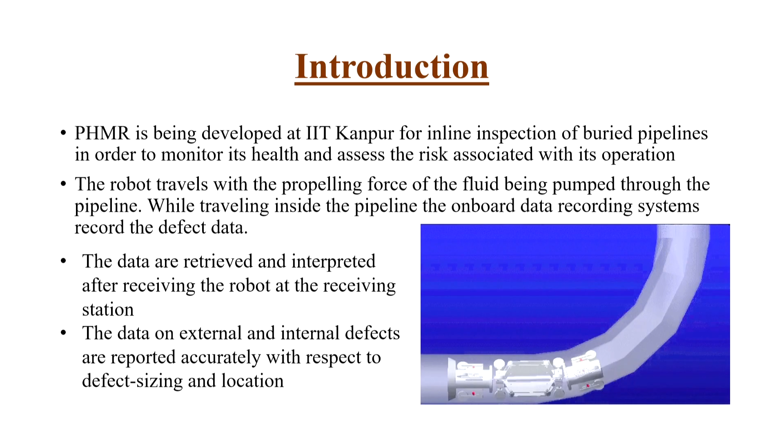The data are then retrieved and interpreted both online as well as offline from the robot, and then interpreted in terms of damages. So, the data on external and internal defects both are reported accurately with respect to different types of defect sizing and location. Now, this is a project which had been sponsored jointly by the Gas Authority of India Limited and also by the Ministry of Education through Uchchatar Avishkar Yojana.

Now, what were the objectives of this product design? Well, PHMR was aimed at developing a pipe health monitoring system which will be comprising of a range of smart sensors. Now, the outcome should be such that we should be able to design and develop an effective and economic pipeline health monitoring system based on smart sensors integrated in a crawler robot and an efficient data communication.

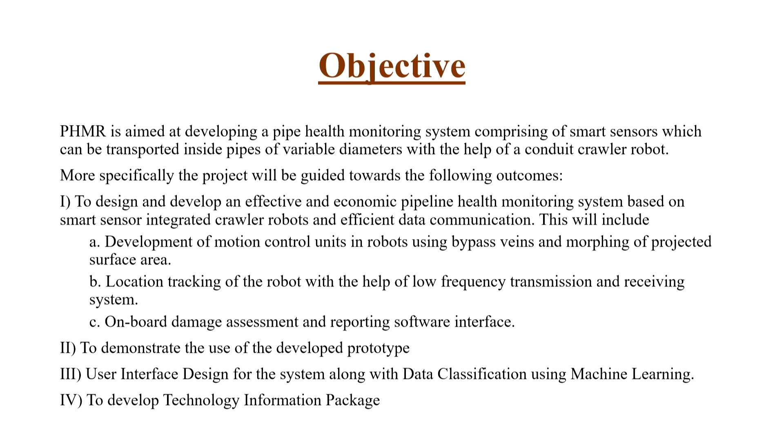So, these sensors will include development of motion control units. The entire system will include the development of motion control units in robots using different types of techniques, I will explain it later on, like bypass vanes or morphing, and then location tracking of the robot with the help of low frequency transmission and receiving system, and then onboard damage assessment and reporting software. Then we will demonstrate the use of the developed prototype. User interface must be developed and the technology information package is to be developed.

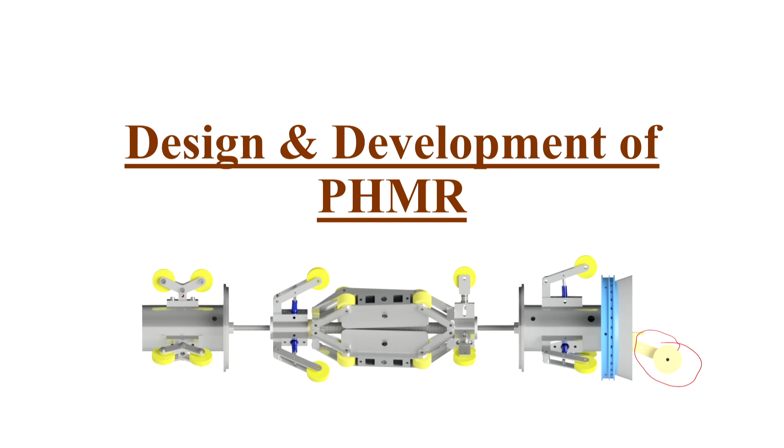So, as you can see, this is the entire PHMR, and the last one is not actually a wheel, but this is called odometer. This actually senses how much distance it is traveling. I will soon tell you about different parts of this PHMR. Now, such products cannot be developed all in one phase. So, in 3 phases, 3 different types of robots were first developed.

PHMR1, which was the initial prototype, has sensors like a smart sensor called PVDF. It is a polyvinylidene fluoride type of a sensor. This is a piezoelectric sensor. So, what does the piezoelectric sensor do? It actually gets data if there is a dynamic strain change, or if there is a deformation of a finger like appendage, which I will show you later on. If it gets deformed, it collects the deformation data and interprets it in terms of the damages in the pipe. It also has point magnetic flux leakage sensors, MFL sensors, and also optical sensors. It also has a turbine for the power generation.

Now PHMR1 of course was made of a cheaper model because it is a rapid prototype. So many times in order to develop intelligent products, I always say develop the first functional prototype, which is just the demonstration of the concept. So in this case you do not have to think of the actual material. So in this case we have parts which are made of not a very highly rugged material. But the second one is based on a fully aluminum body, and later on we have used an even higher grade, space grade aluminum alloy.

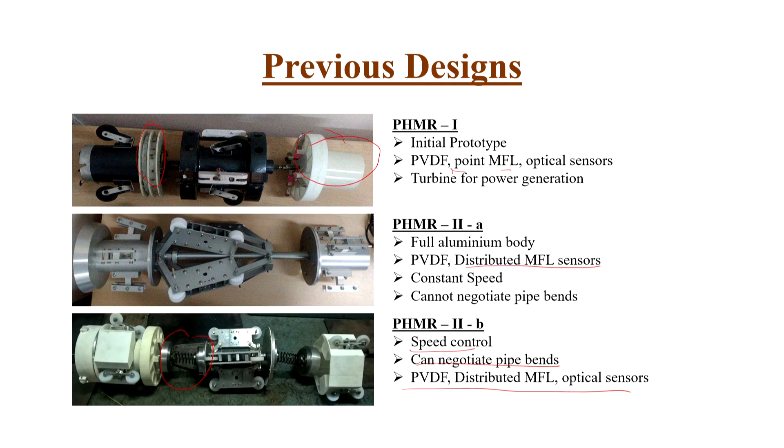Finally, we came to the third model where we can do speed control and negotiate pipe bends by designing these joints suitably. We have PVDF, distributed MFL, and optical sensors, three different types of sensors in it. So the final one that has been developed is PHMR2C.

PHMR2C is the final robot in which you can harvest the fluid flow energy. There are three modules: the front module, which is the tip one, then the middle module, and then the rear module.

The LED-LDR sensors are used in the rear module for optical sensing, and you also have the touch probe sensors I told you about earlier. Magnetic flux sensors are also present in order to calibrate the system.

This is the specification of the whole system. As you can see, the front module is 150 millimeters, a smaller one, and its weight is about 1.7 kg, made of space grade aluminum alloy that I told you earlier.

The middle module is the longest, 373 millimeters, and its weight is also more, 4 kg. The rear module is 205 millimeters, slightly smaller but longer than the front module, and weighs about 2.3 kg, lighter comparatively, and of the same material.

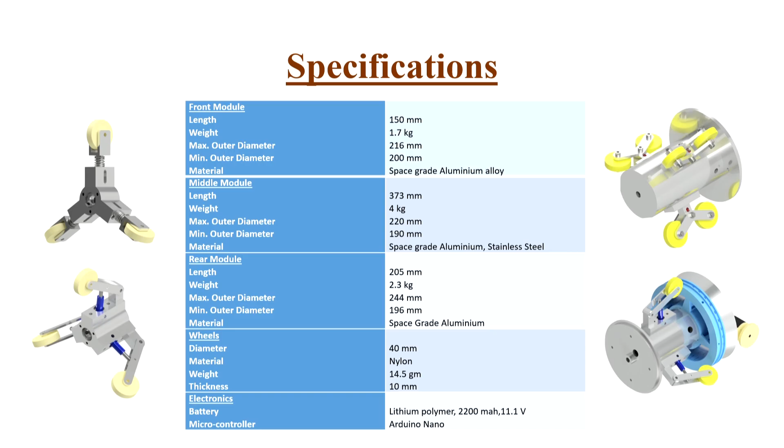In order to develop such systems, you also have to develop the atmosphere for testing. People will not allow you to just use it in an existing system, so we have to develop a compressed air test bed system. This air test bed is something very unique in our country.

In this pipeline system, instead of natural gas, compressed air has been used, which is smaller in density but still gives a very good estimate of the system. This complex system is based on a 30 meter by 7 meter test bed system.

It has two sides which can go vertically down up to 21 degrees, simulating the typical bend in the pipeline, vertically as well as horizontal bends at the two ends. We have a 90 degree horizontal bend and about a 20 degree vertical bend in the system, which simulates the actual working environment of the pipeline network.

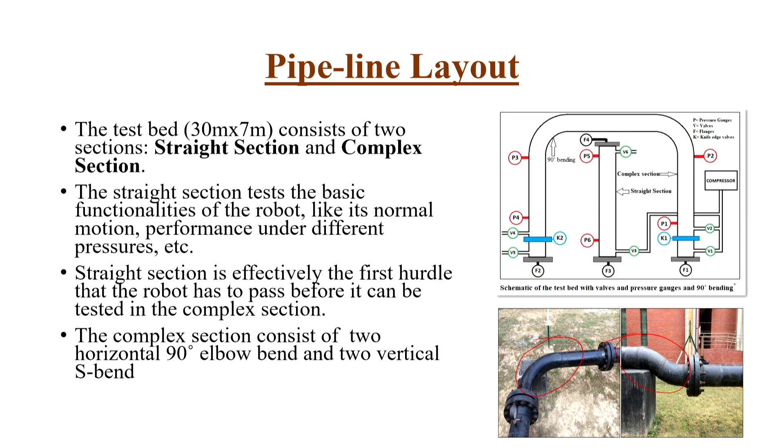In this network, we have a launching and a receiving station. You first put the robot in a particular zone, then divert the air pressure, and a knife edge valve opens up, so the air pressure thrusts the robotic system into the main pipeline system. That is the way the launching system works.

In the receiving part, we have a receiving section where you can vent some air out, so that you can reduce the air pressure, and as a result the robot's speed comes down.

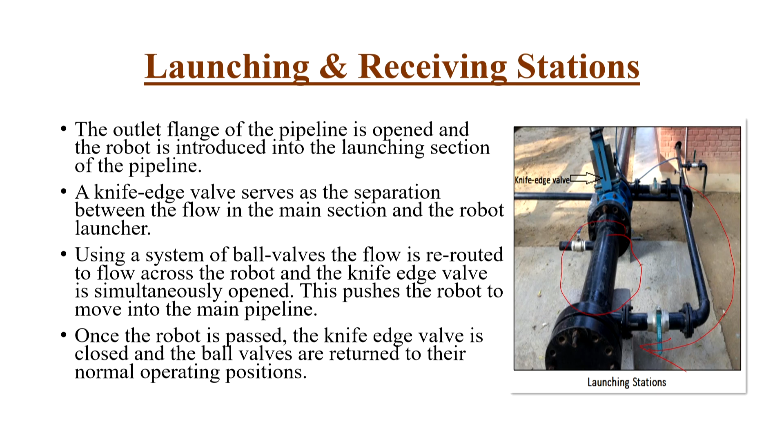As I told you, there is a range of sensors in it, a total of 12 working sensors. There are 4 magnetic flux leakage sensors, and these sensors are based on giant magnetoresistance. What is GMR?

GMR sensors are such that in the presence of a magnetic flux change, the resistance of the system changes, so that if you have an electrical circuit corresponding to it, the change of resistance will show that there is a leakage that has happened in the system.

Then you have the PZT, lead zirconate titanate, so this is a PZT based touch probe. This smart material gives you a very high bandwidth sensing. Like shape memory alloy we saw last time, which is a low bandwidth smart material, these PZTs are high bandwidth smart material, so they can be used as sensors very well, though not so good as actuators.

There are 4 such touch probes. The touch probes basically touch the pipe surface, and if there is a crack or some development on the pipe surface, corrosion or something, that will create a strain on the probe. Like if you imagine this is the probe and this is the tip of it, the change in the surface will create a signal, and that signal is captured by the PZT probe, and that is what we record.

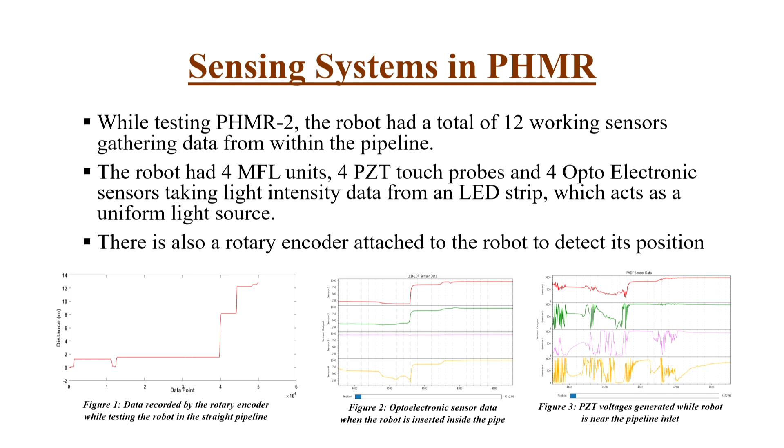There is also a rotary encoder, shown earlier, attached to the robot to detect its position. Now, the optimal placement of the sensor is very important - what will be the array size, how far it will be from the pipe surface, what we call the lift-off distance.

What will be the separation distance between the magnets - you have to do both virtual modeling through digital simulation as well as carry out experiments. Similarly for the touch probe sensor, what will be the optimal probe size, the placement of the piezoelectric sensor, flexural rigidity of the beam, how much deformation it can have - it should not be too soft, it should not be too stiff. Then the control of the spiral motion - all these things need to be done through both modeling and trial and error.

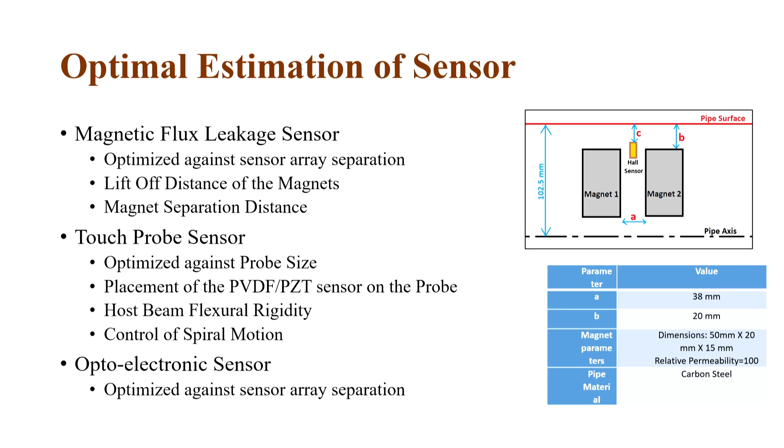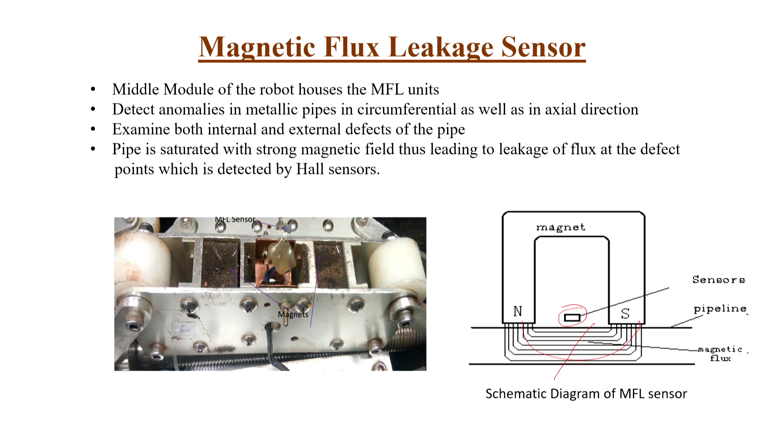And similarly for the optoelectronic sensor. So you can see the magnetic flux leakage sensor - the basic principle of the MFL sensor is that a magnetic flux is generated, and if there is a crack, some of these field lines will come out and the sensor picks that up. Hall sensors and GMR sensors are typically used to pick up this break in magnetic flux.

This is how the touch probe sensor looks - it's partly trapezoid, partly triangular in section, such that if this part is subjected to some kind of pipe surface corrosion, there will be a vibration, and that vibration is picked up by the piezoelectric crystal. That is the uniqueness of this touch probe sensor.

Then there is this optoelectronic sensor. The optoelectric pair has an LED and LDR - a transmitter on one side through the LED, and the LDR on another, arranged in an array formation. Each pair absorbs the light coming from the nearest LED source, and from that it tries to understand the damage in the system.

Now, so many sensors need to be interfaced, so we have employed an Arduino microcontroller. The Arduino first triggers the on-off situation for when the sensors will be active, and determines the threshold level at which the sensing data is considered significant. Then it instructs each sensor to send data, records it, and once that's done, the Arduino closes the cycle.

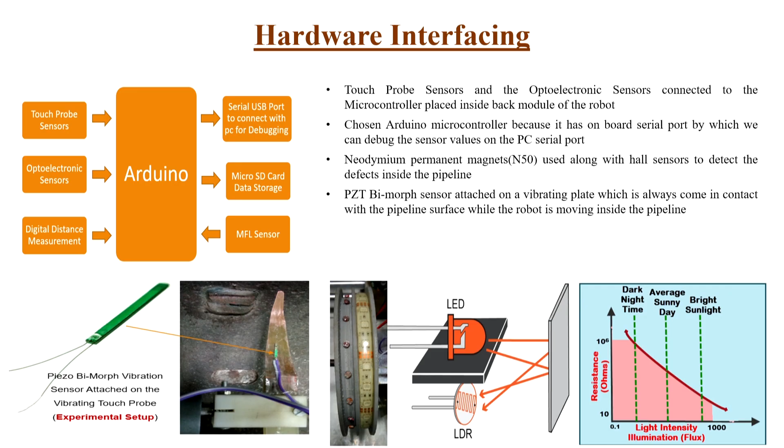So each of the sensors is controlled by the Arduino, and the data goes to a serial USB port and a micro SD card for data storage. Some of the data is also sent directly for real-time communication, so that at least you know where you are.

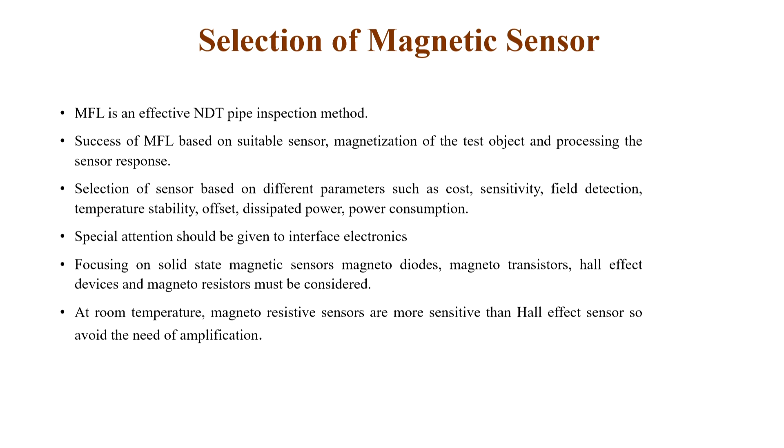The GMR sensor is based on giant magnetoresistance. Key issues include cost, sensitivity, field detection capability, temperature stability, offset, and power dissipation - many important parameters you need to calibrate in order to come up with a good GMR design. These are things to keep in mind while selecting the magnetic sensor.

The GMR sensor is based on a system where a magnetic layer is sandwiched between copper conductive non-magnetic interlayers, sometimes based on iron-chromium-iron layers. This multi-layer system shows sensitivity in terms of changing electrical resistance due to changes in the magnetic field or magnetic flux surrounding the sensor.

So why do we go for the GMR sensor rather than the Hall sensor? That's because GMR sensors have much higher sensitivity. In a pipeline system, even a micro crack or hairline crack can create large failures and fatal situations, since these gases are highly inflammable. We need to detect such hairline cracks early, so we need a highly sensitive sensor network - that is why the GMR sensor has been used.

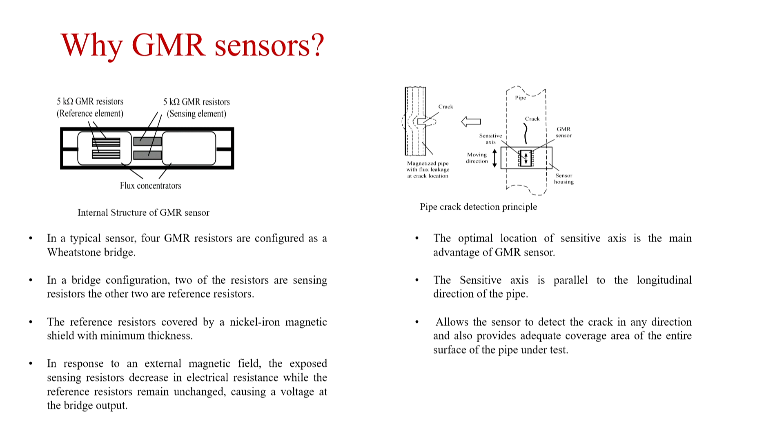That is one of the important considerations of choosing such a system, that they are sensitive to the external magnetic field. The optoelectronic sensor implementation part is based on LED and LDRs. Now, LDRs have lower sensitivity than photodiodes and phototransistors, which are semiconductor devices that use light to control the flow of electrons and holes across the PN junctions.

The property of photoresistors is that there is a time latency between changes in illumination and change in resistance, which happens because of the presence of change in photoluminescence. It takes about 10 milliseconds for the resistance to drop completely when light is applied after total darkness, while it can take up to 1 second for the resistance to rise back. That is the type of response time this system needs, so LDRs are slower that way.

LED LDRs also are not suitable for high lift-off and high linear velocity, which is why we go for photodiode and phototransistors. The optical sensor implementation in terms of phototransistors is quite small, 7 by 7 by 6 millimeters, and typically the output current is about 1 milliampere. The emitter wavelength is 950 nanometers, so its effectivity is from 0.6 centimeter to 2.3 centimeter range. That is about the phototransistor type optical sensor.

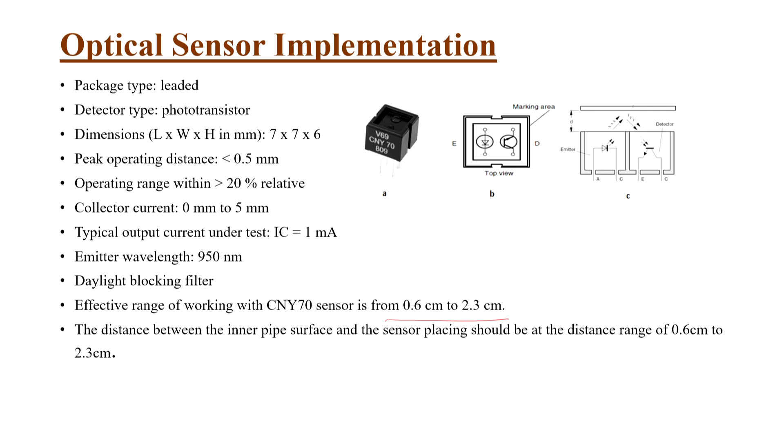I mentioned that we also used a rotary encoder. Rotary encoders are used for distance measurement, and this one is an optical rotary encoder, meaning it is again based on some kind of LED-LDR principle, but it can very precisely measure how many wheel rotations have taken place. So, assuming there is no slip of the wheels, you should be able to figure out how much distance you have traveled, because you have the map of the system available with you all the time, so you can also say currently the robot is at which location.

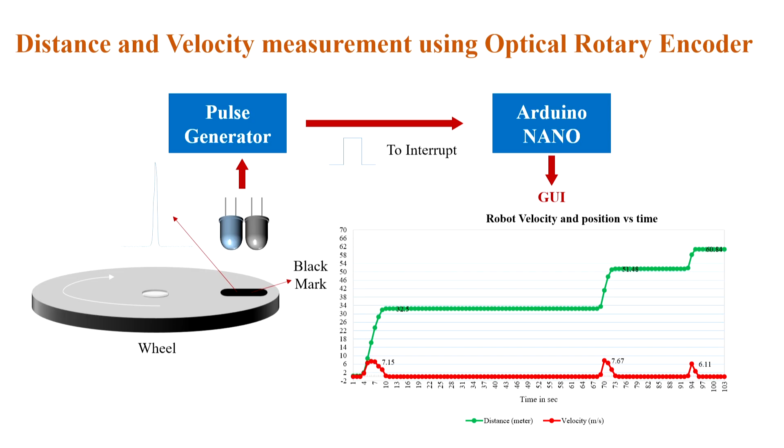Now I come to one of the most intricate parts, speed control. Speed control is important for such a system because you are essentially scanning. As you scan the pipe, if the robot moves at different speeds in different places, then the scanning will be faulty, and you won't be able to know exactly where the error is.

So, in order to keep the speed in a particular narrow range, you must have some kind of autonomous governor system. You cannot use large power, as the power supply is limited, as I told you, only for the sensors. So the system should be physically intelligent autonomously. To do that, two things are needed: a motion transmission system and a hydraulic braking system.

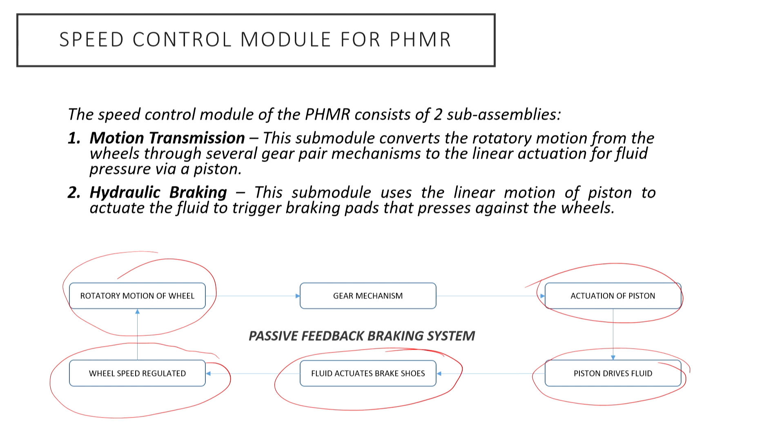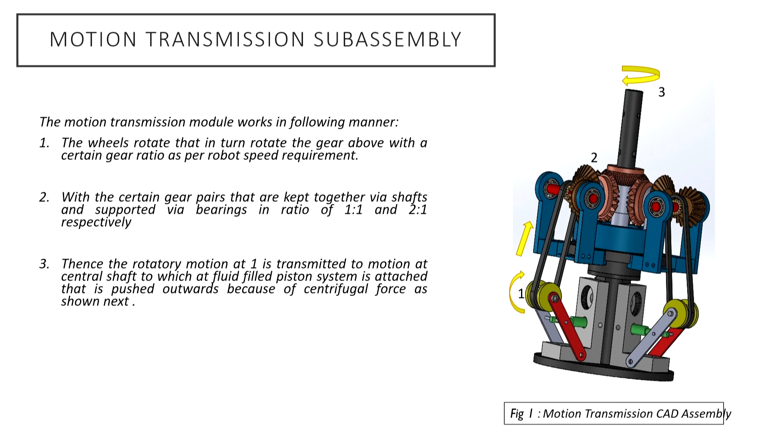Now, if the wheel speed comes down too low, the governor works again and the rotational motion needs to be increased, so a command is sent to the system that hydraulic pressure is decreased until it reaches the particular level at which it should run. The motion transmission sub-assembly transforms the wheel's rotation through the gears and a certain gear ratio, and this rotational motion is transmitted to the motion of the central shaft, which finally works in terms of pushing the hydraulic pressure to reduce the speed of the system.

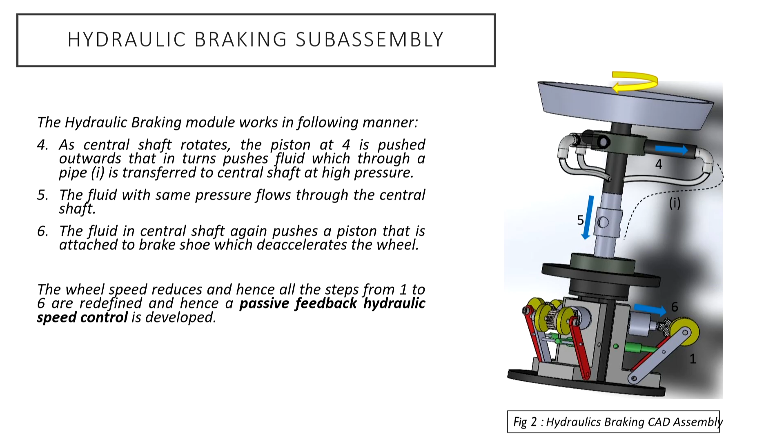So, this is the hydraulic braking sub assembly. As you can see here, as that central shaft is rotating, the piston is pushed outward, and the fluid with the same pressure flows to the central shaft, and that gives the braking mechanism. So, this is basically a kind of an intricate governor system that has been developed for it.

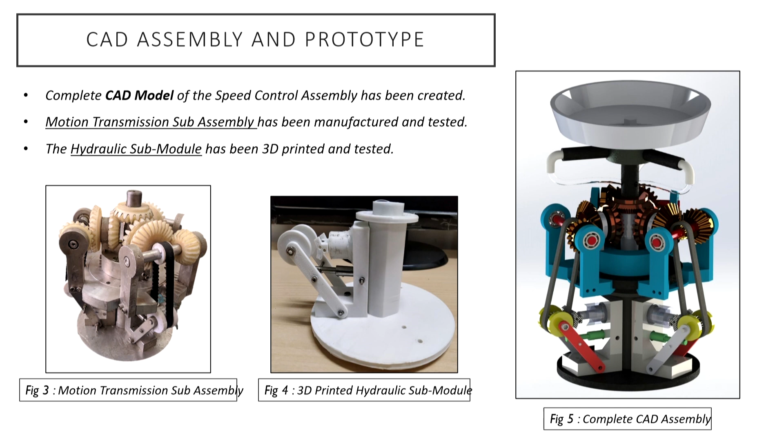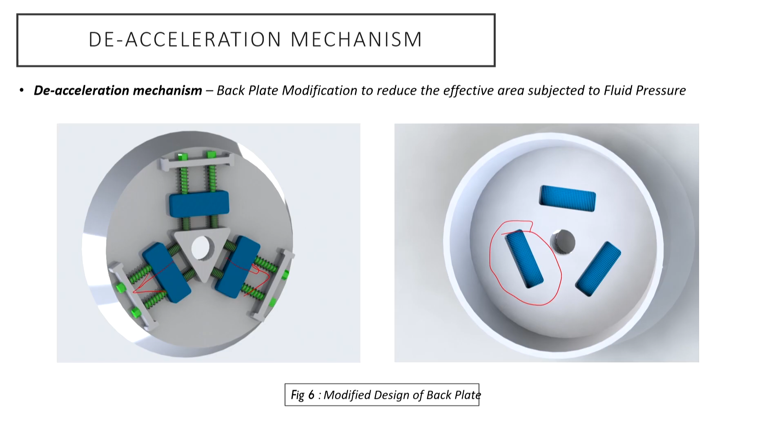Now, this is the complete CAD assembly of this very intricate speed control system. I also told you that there are certain deceleration mechanisms other than the governor, and that is in terms of using the bypass valves. So, as the speed increases, these covers move, and as they move, they open up more bypass area, so that some amount of air gets bypassed. So, they do not deflect, and that is how you can also control the pressure. So, you can see how the mechanism works and how you can get more bypass in the system.

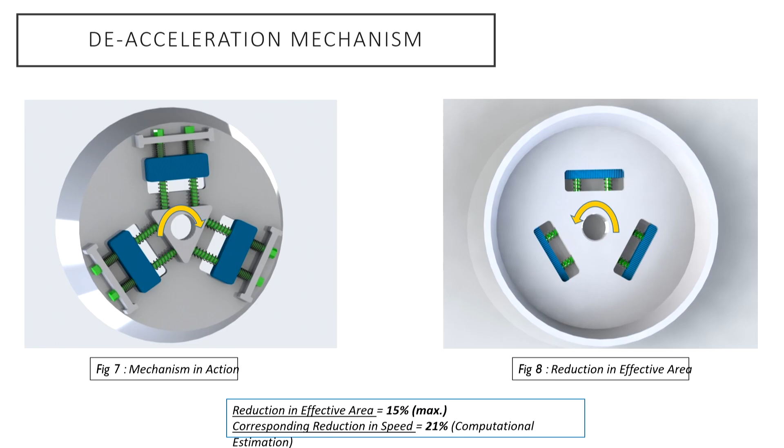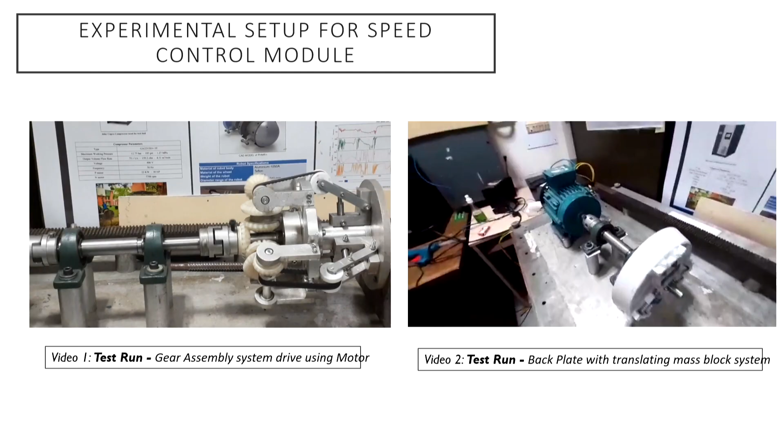So, this is like a test run of the system first before you install such a system. You can see we are rotating it artificially. We are assuming as if the wheel is rotating and that is transferring the movement through the bevel gears, and that is going to actuate these particular valves, so that you can get the basic action of braking.

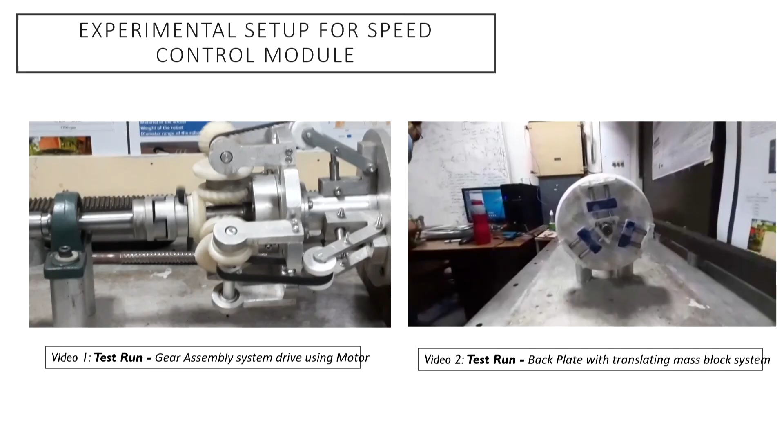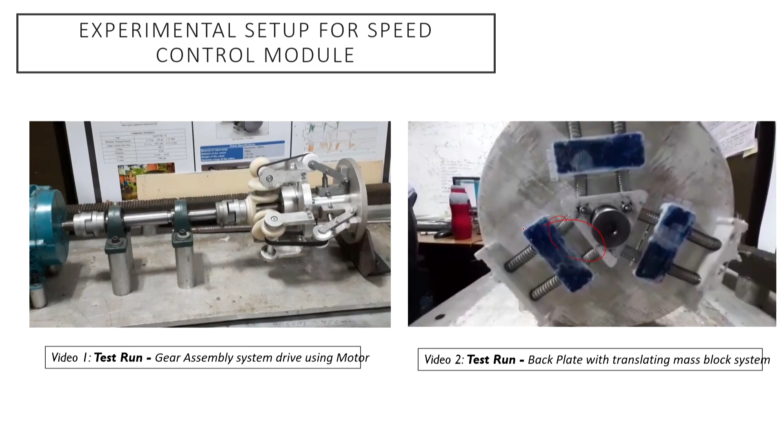And this is the back plate, where as it moves you will be able to see that the bypass actually starts to open up. If it moves beyond a particular level, these are going to open up and create a bypass, so that the flow can be bypassed through such a system.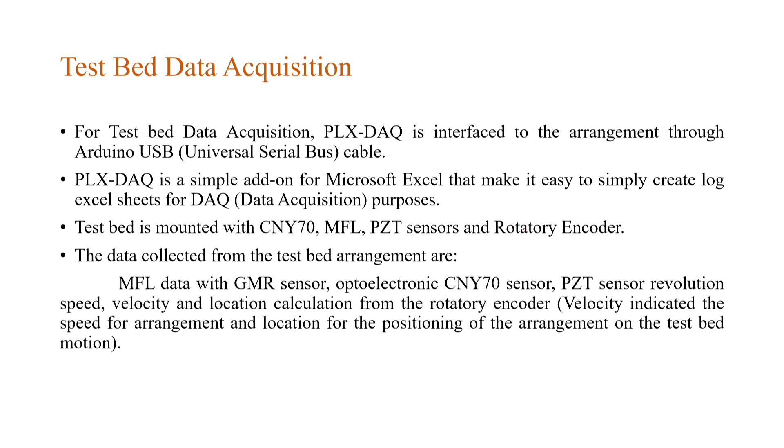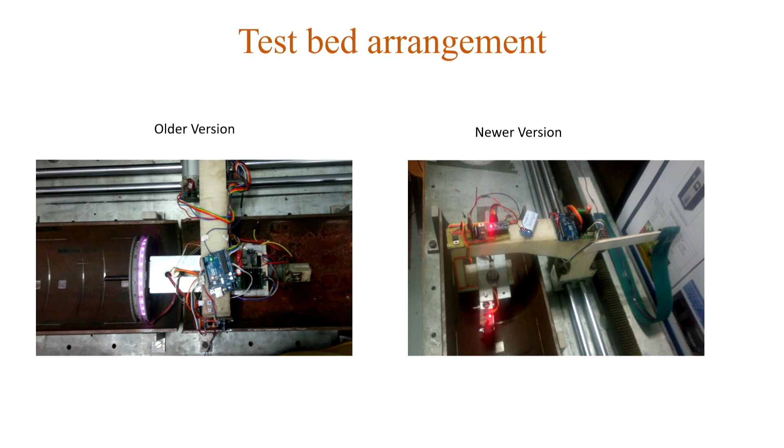Now you need to have all the data acquisition related to each one of them. So there has to be a test bed data acquisition system. In this case again Arduino is used for this data acquisition system for all the types of sensors: MFL sensor, optoelectronic sensor and PZT sensor. In order to do it, first we have to check in an artificially cut half pipeline how each one of the sensors works, and how you can sense the data.

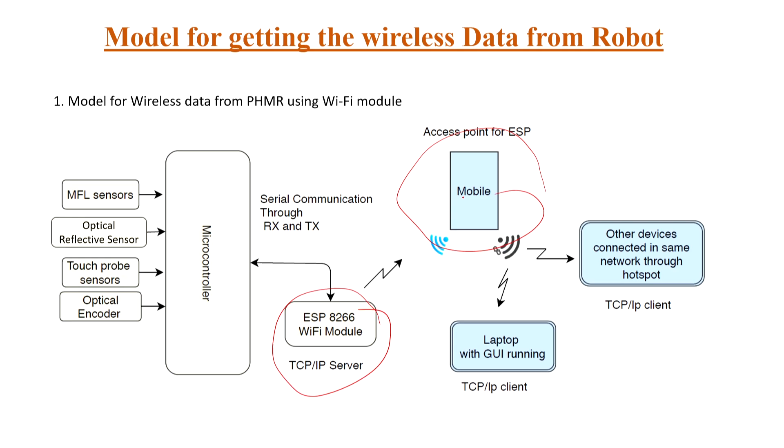You also need a good graphical user interface. First of all, you are getting the wireless data from the robot, from the microcontroller, which has to come through the ESP module to systems like a mobile or a laptop, and then from there it needs to be displayed in a certain way. So this entire protocol you have to develop for the wireless data collection of the system, and then display the result with the help of a graphical user interface.

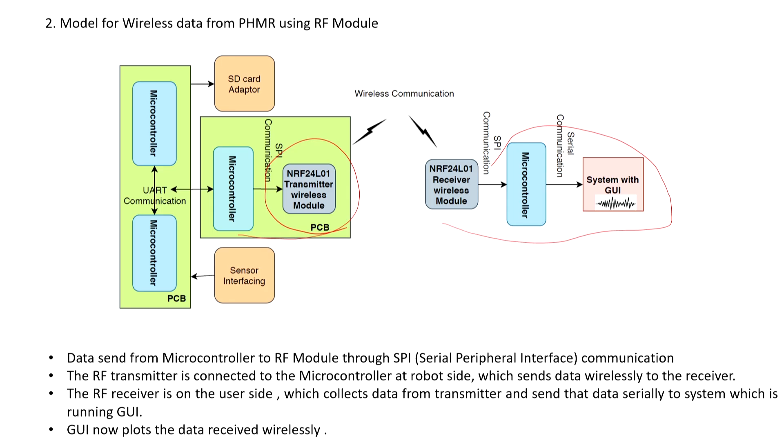So you can see the entire system here, that's the PCB and the microcontroller, the sensor interfacing works, and then the microcontroller sends the data, and through wireless communication it comes to another microcontroller and to the system with the GUI, and that GUI displays the data for people to analyze it. You can see here how the data are coming: optical reflector data, MFL data, optical encoder data.

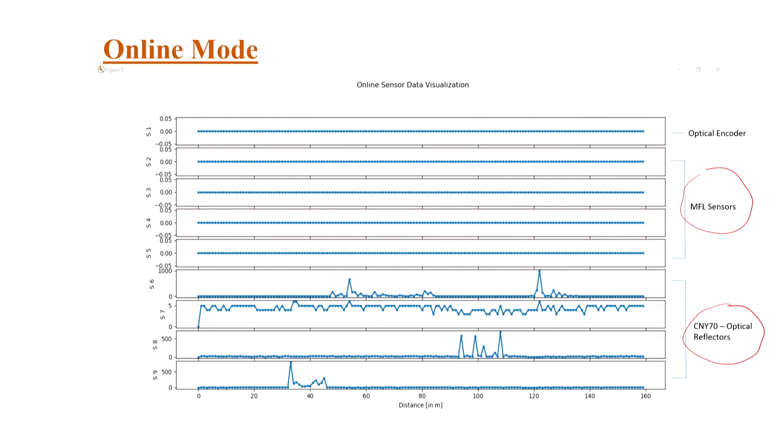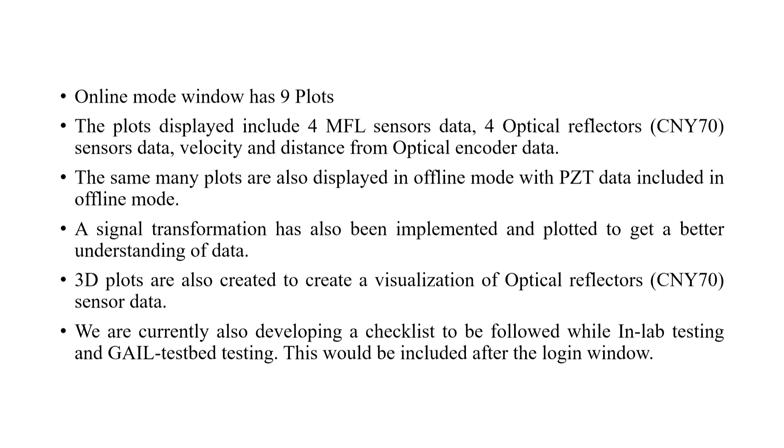Now not all the sensors may be able to capture the cracks all the time, and that is why you need multiple sensors, so that you can fuse all the information and get a picture from this entire system. So this online window has 9 such plots. You get 4 MFL sensor data, 4 optical data, and then the optical encoder data. So you get all of them together, and then you can fuse it.

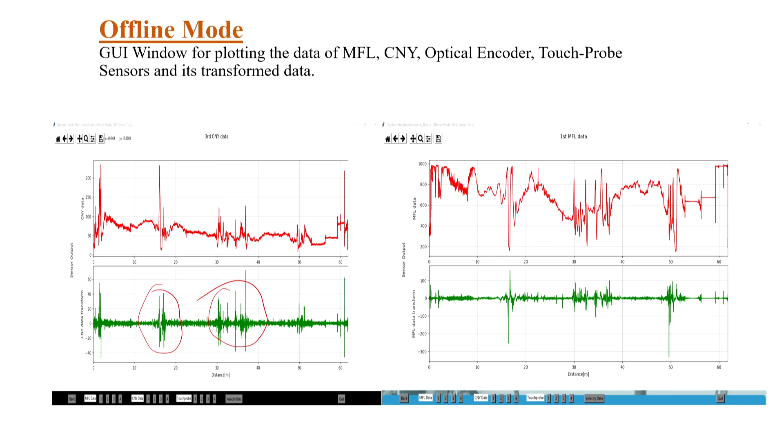So you can see how this data would look in an offline mode, and each one of these peaks is surely going to say something about what is inside the pipe, be it bending, joints of the pipe, or cracks or corrosion. Of course, you will need SVM or such type of machine intelligence in order to learn which one is for what.

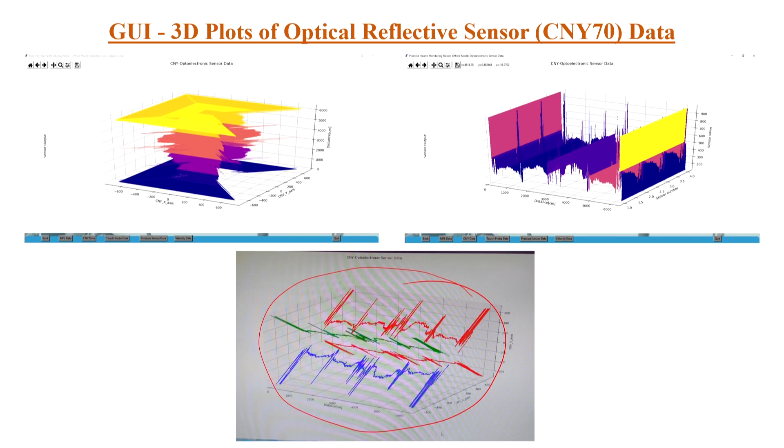So this is the development of an intelligent pipe health monitoring robot that we have created for monitoring pipelines. Keep in mind that our country has, only in terms of gas pipelines, something like 15,000 kilometers of gas pipelines. So their sensing is extremely critical, because through that you will be able to talk about the life of the pipelines. So our PHMR robot along with the sensors can actually predict this life.